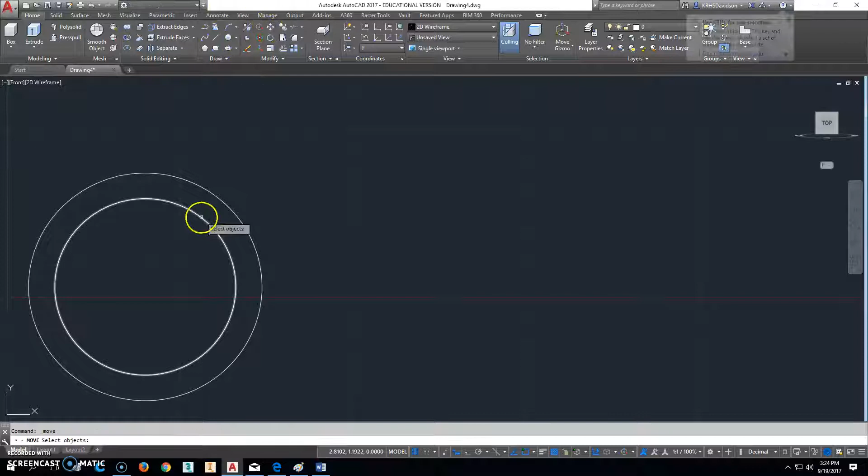I'm going to do center diameter and do a 3.38 diameter there. I'm going to go ahead and do the circle that goes on the other end, with a diameter of 2.62, and move it this direction with ortho on, F8. I move it that direction, 7.12.

So now with everything centered up there, we can think about what to do next. We'll do a circle that has a center diameter of 2, and one on this end over here with a center diameter of 1.38.

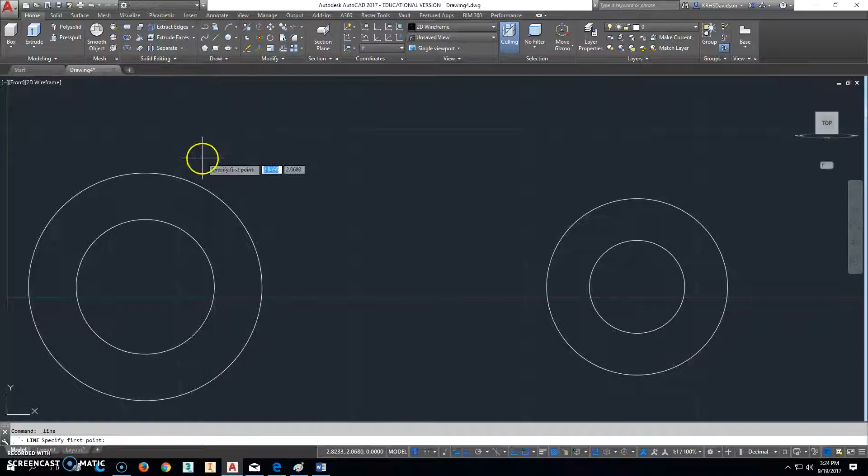Alright, so then we're ready to do another line - a line that goes from shift right click tangent here to shift right click tangent over here. That's on an angle. Do the same thing over here, a line that goes shift right click tangent over here to shift right click tangent over here. So that's what that piece would look like, looking straight at it, if we were looking in this direction.

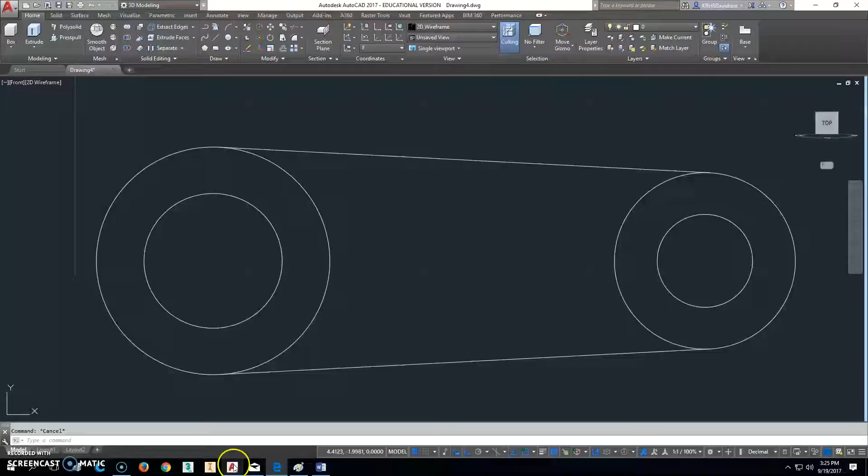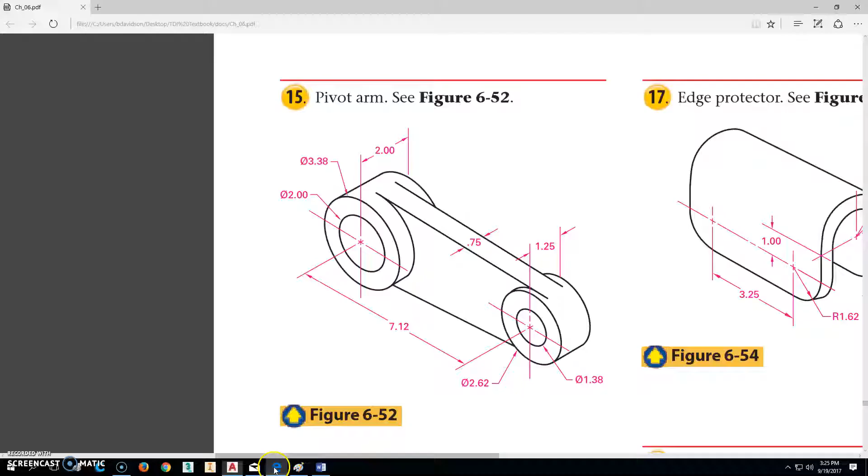So next we're going to go back to AutoCAD, click on the little home button, go to the side, and presspull these in that direction, back to 2 inches on that one. We're going to presspull again in this part right here, back to 0.75, and this one we're going to presspull back. That direction was 1.25, so we'll go 1.25.

Now it's not centered the way it should be, so we're just going to separate all these. We're going to move this part over here, move this part right here over here out of the way, and move this part also there. So we're left with whatever was there in the middle, and I don't need it anymore, so we're just going to get rid of it.

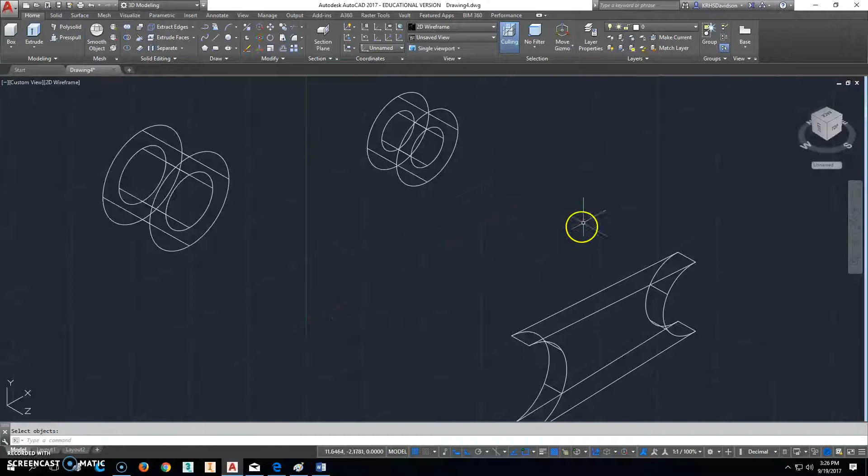This is where it's going to get kind of neat. What we're going to do is click a line that goes from that center point there to this center point here, and do a line on the other end that does the same thing - a line that goes from that center point to shift right click this center point.

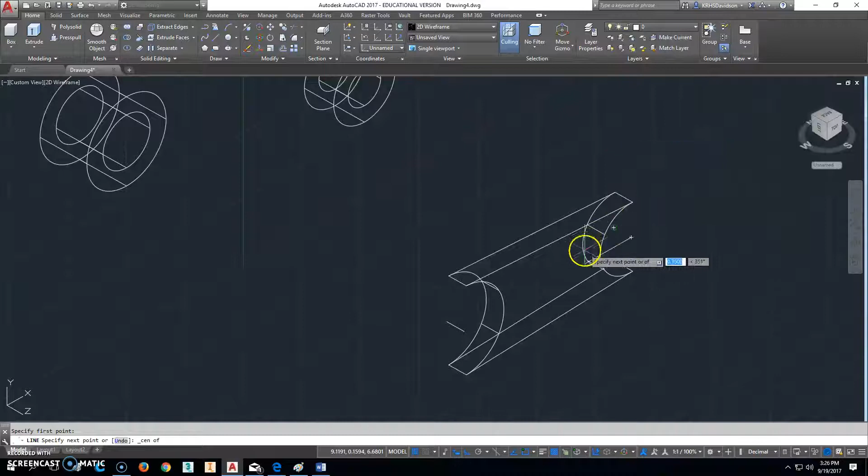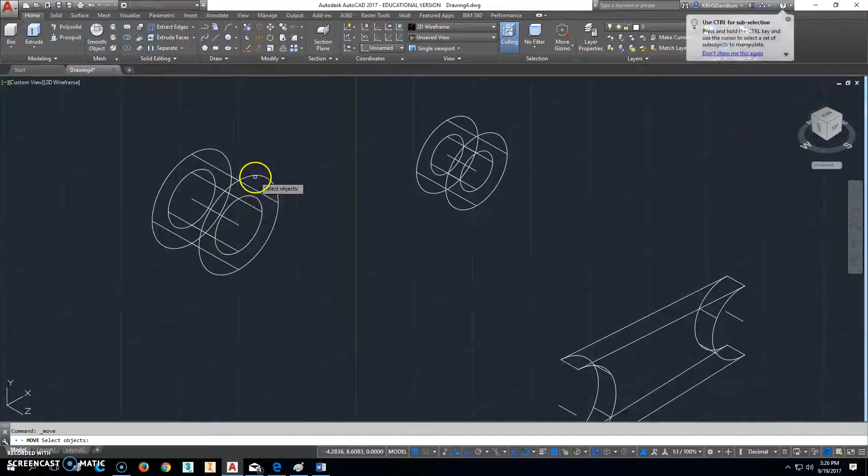Do a line that goes from here to here, and another that goes from here, shift right click, to here. Alright, so now we've got a line that goes through the centers of those. So when I click move, I can move this from that midpoint right there to this midpoint right here - it's perfectly centered that way. So I'll move this one right here from this midpoint to that midpoint.

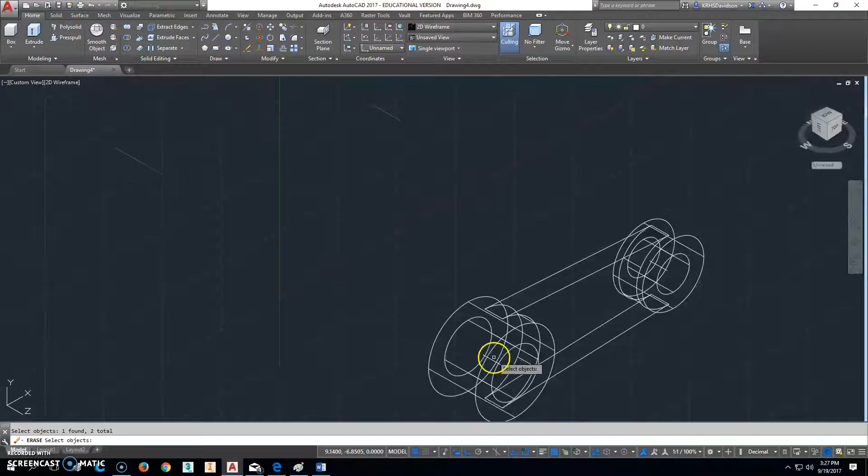Now, there's other ways to do it. You can do the math if you really wanted to figure it all out that way, but I don't really want to. I'd rather use what I have there to figure it all out.

All right, now what I have here is 3 separate pieces. So that's that, and this part isn't - it's 3 separate pieces. So you have to take the union here and union them all together. So I'm going to do a crossing, cross all of those. So now I have a solid part.

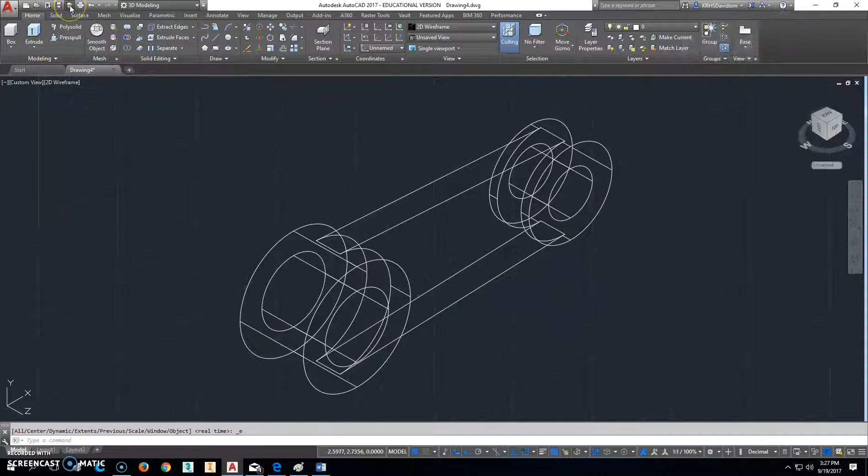So now I'm ready to go. Click Save As, and this is going to be 210-6-52, the pivot arm.

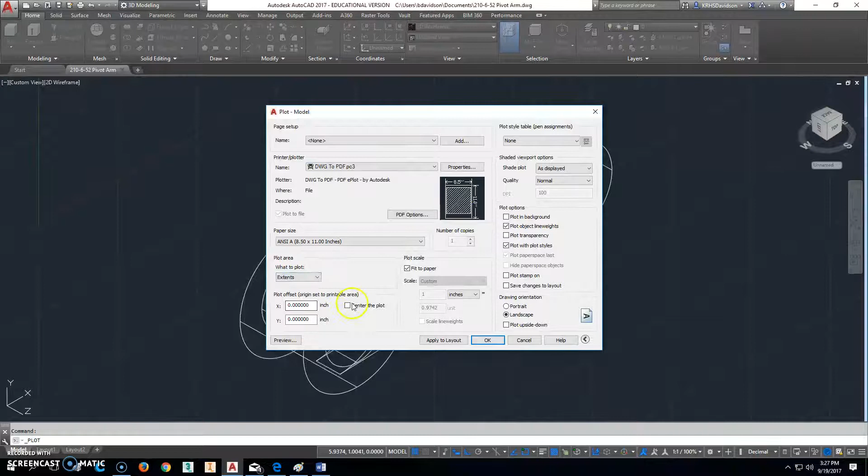Alright, save there, and go ahead and click print, PDF. Extents. That's centered on there perfectly. Right click - oh no, go ahead and click plot. So that creates the PDF file that we need.

And once you've got that PDF file, that is exactly what you would submit if you were submitting it for a test.